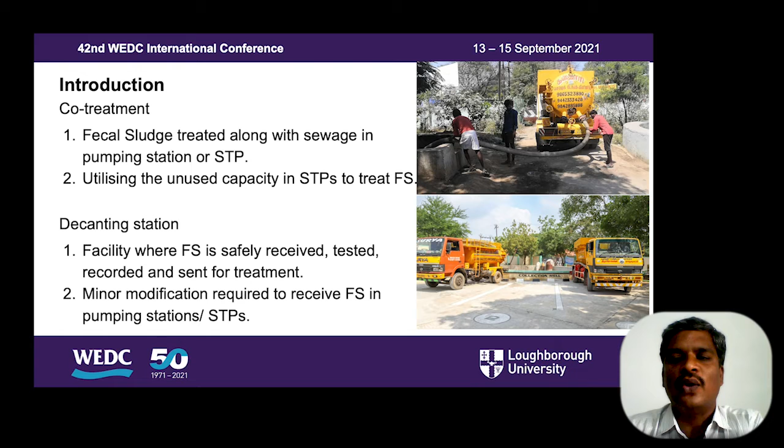Fecal sludge receiving facilities known as decanting stations need to be established so that desludging trucks can dispose the collected waste safely. Converting existing pumping stations into decanting stations is the most preferred option as it incurs almost no additional cost and also allows for optimum resource utilization.

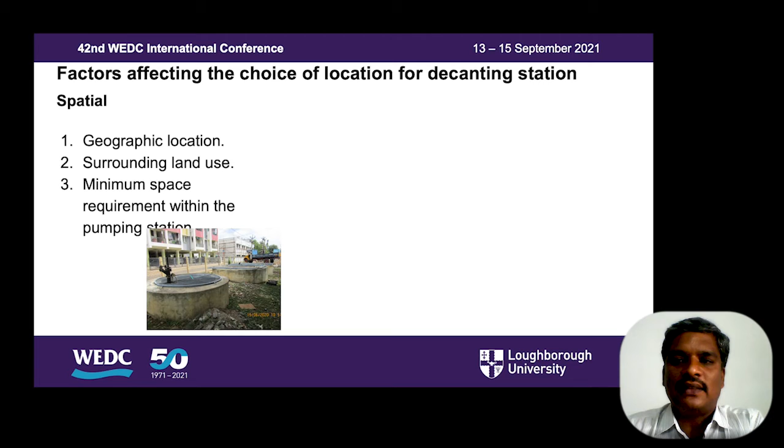There are multiple factors to consider while selecting the location of such facilities. The factors affecting the choice of location for decanting stations can be clubbed into three categories: 1. Spatial, 2. Infrastructural, 3. Operational and sanitation. The location of decanting stations should be such that together they provide coverage to the entire city. Usually, desludging trucks will not travel more than 10 to 12 kilometers for each decanting operation. Therefore, more decanting facilities spread across the city encourage the desludging operators to use the nearest facility.

As you can see in the map, dispersed location of decanting stations in the city of Tiruchi in Tamil Nadu has ensured that more coverage is achieved with the provision of only 3 decanting stations. Similarly, the location of decanting stations should be decided taking into consideration the surrounding land use. Decanting stations are not preferred in city centers, residential areas, and high density areas. There should be good access to the decanting station and also space available within the station for parking and maneuvering the truck. In decanting stations where preliminary treatment units have to be constructed, space availability for the same also needs to be ensured.

Infrastructure. The quality of existing infrastructure should be considered while selecting the decanting station. Pumping stations with preliminary treatment infrastructure available and those that have a paved premises should be given priority. After considering the spatial requirements discussed earlier, availability of infrastructure to remove, store and dispose non-biodegradables, for example, napkins, plastics and grit, can be an added advantage.

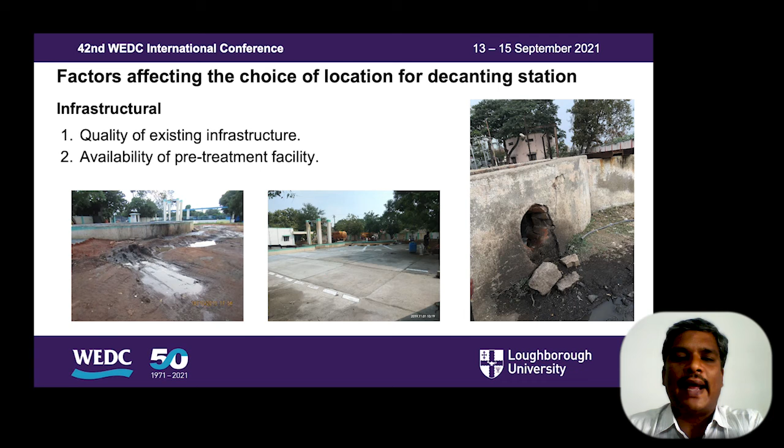The other key factors affecting the selection of site for decanting station are related to operation of the facility. The pumping stations should have the capacity to handle the expected volume of fecal sludge. The additional fecal sludge should not lead to overflow in the system. Odor nuisance to the general public can be limited if the decanting station is not located close to busy streets or more frequented areas. Similarly, spillage minimization should be ensured in the decanting station.

In order to ensure operational sustenance, the decanting station should have skilled human resources to screen the incoming fecal sludge so that industrial waste is not mixed. Decanting stations that have an operator available all the time will help increase the usage time and ensure desludging operators utilize the facility at night as well. In addition, availability of amenities for sanitation workers at the decanting station can also ensure their acceptance and promote regular usage of the facility.

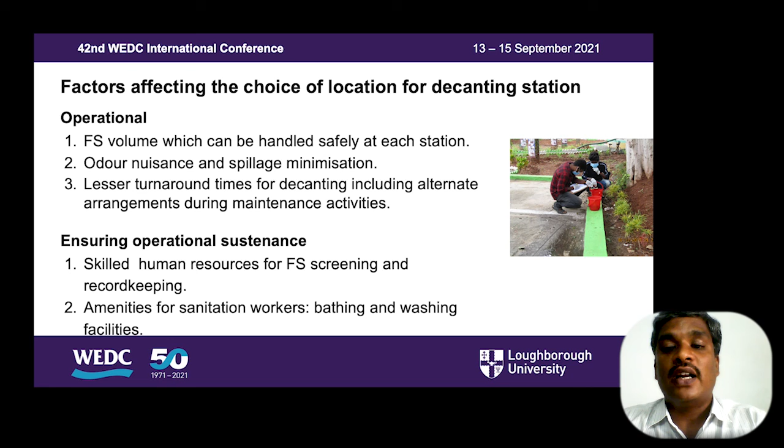It is important to do a detailed comparative study of available options for establishing decanting facilities. It should be noted that establishment of a decanting station is not just an infrastructural question but also has other facets as well which require careful consideration. This will help to ensure sustained operation of the facilities.